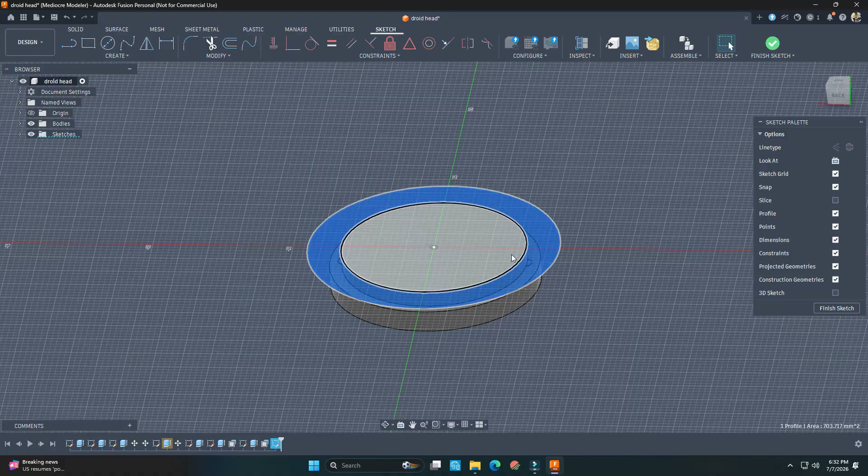But we still have to figure out the head. So let's look at what we got for the head. We're starting off with the disc that we used for the ring that was going to make the dome.

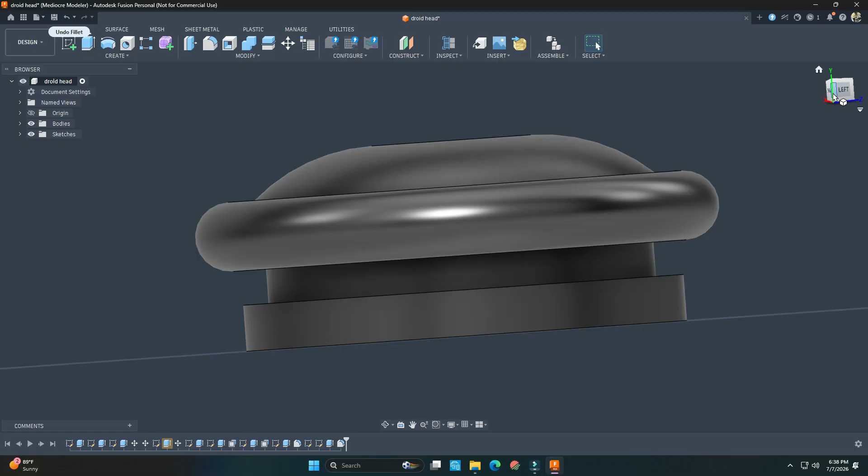I had an idea, I wanted it to look kind of like the probe droid head, kind of bulbous. I'm still learning Fusion 360, so there's a lot of trial and error - let's try this, nope that didn't work, sooner or later we'll get it. But the shape was starting to come together. I didn't want it to look too much like the probe droid, just enough to give it a little bit of that feel. I wanted it to have an offset eye, but not stick too far out and look like a gun turret, and not sucked too far back into the head either.

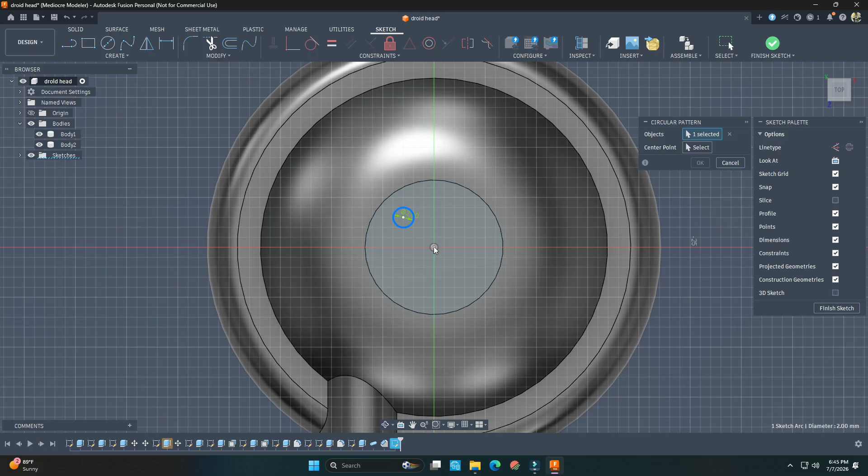It needed attachment points on top for the probes and the radar dish, so I wanted them to be symmetrical. I love Fusion 360 for that - I just had it make me a pattern, six holes, all the same. Such a beautiful program.

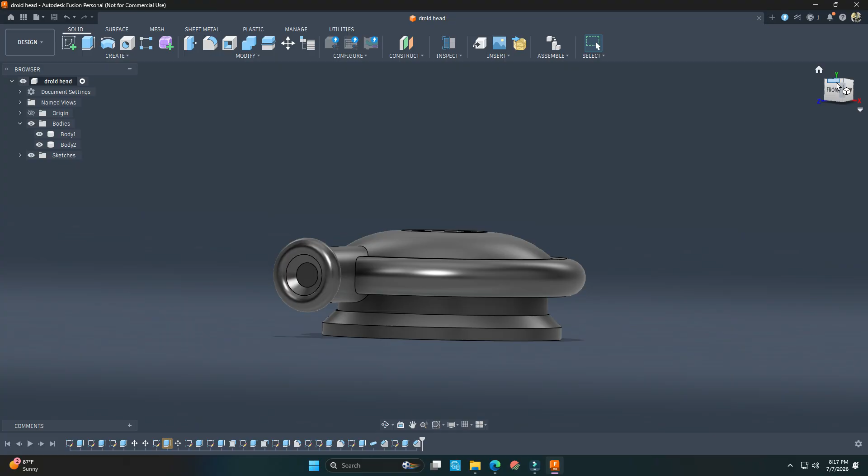While we're waiting on the head to print, I went ahead and grabbed our shoulders because I've done some sanding to them. I've not actually test fit them onto the body to see what it would look like.

Okay, I'm not mad at that. I might want to sand that back a little bit to get it a little tighter into the other arm. That part's okay. I like it, I like it, I like it.

So his hand fell off because there's no rubber ball in there holding it in. So before I glue this all together, I need to put that in there.